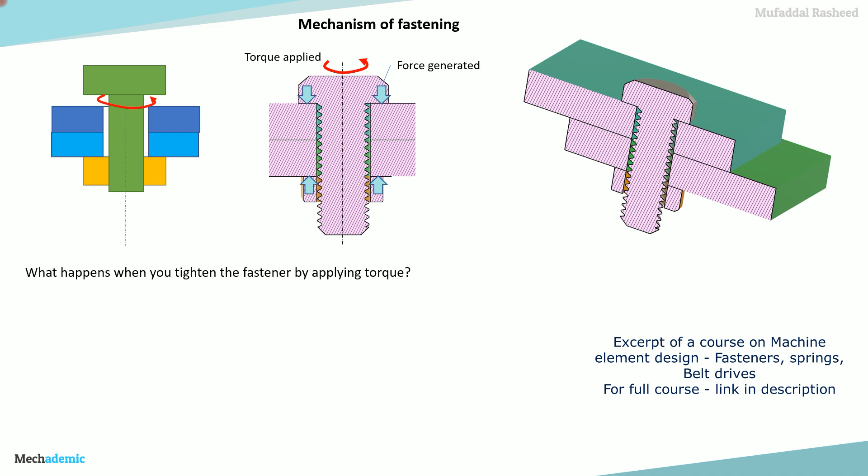So the key question to ask is, what happens when you tighten the fastener by applying the torque? What exactly happens internally inside the components? The first thing is that the bolt head and the nut will impinge the compressive force onto the respective plates, whereas the bolt internally will develop a tensile load. So internally the bolt will develop a tensile load which is tending to pull it apart as shown over here. So while the bolt and nut impinge the compressive force onto the plates, the bolt internally will have a tensile load acting inside it.

So this tensile load is induced due to the application of torque, and it is called the preload. This tensile load is very critical for the integrity of the joint. This load increases as more and more twisting moment or torque is applied, and it can reach as high as the elastic limit of the material. In many high strength applications, this preload or internal tensile load can reach levels of the elastic limit of the material for very high torque values, and it can also damage the bolt if the torque is applied excessively.

This internal tensile load acting inside the bolt will be equal to the compressive load which the bolt and nut impinge onto the plates respectively. If there is no external loosening happening outside the joint, the retention of this internal tensile load inside the bolt will make sure that the clamping is taking place and the function of the fasteners is satisfied. So irrespective of the external loading, the preload will always remain and maintain the integrity of the joint. If the preload or the internal tensile load is lost, the integrity of the joint will be lost.

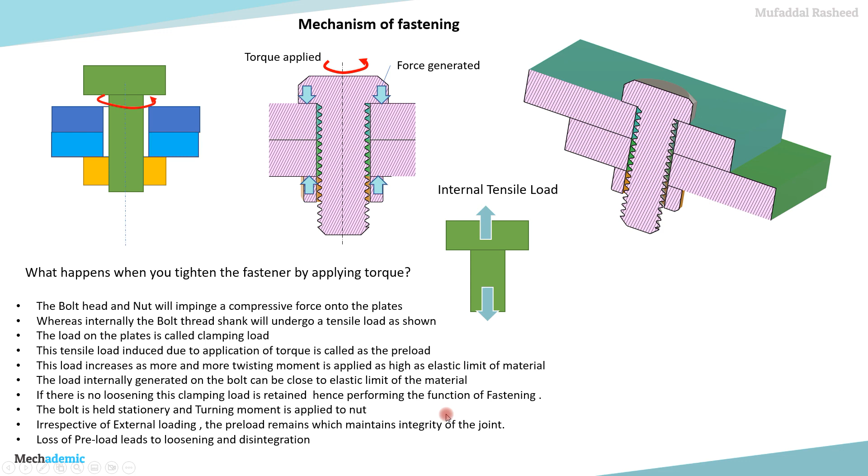So if we separate the plates and the bolt, we can understand the free body diagrams of each. So when the torque is applied, there will be compressive forces acting onto the plates as shown over here. If you consider the two plates as a spring, then the spring will compress. And if you consider the bolt as a spring, the internal tensile load will tend to expand the bolt. The analogy of the plate material and the bolt material with a spring is because the deformation is generally in the elastic range. So when the deformation is in the elastic range, the material acts like a spring with a stiffness K, which is a function of the geometry.

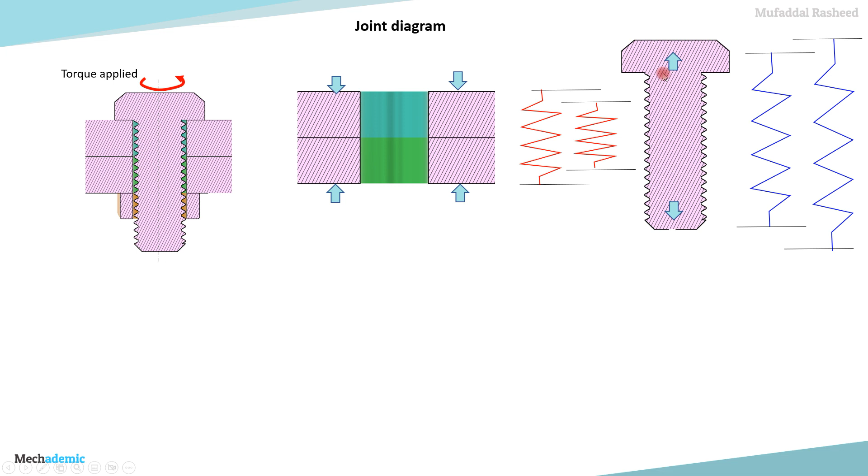So because of these loads, the compressive loads on the plates and the tensile loads on the bolt, there will be displacement. The displacement which the plates undergo will be in compression. The displacement which the bolt undergoes will be in tension. So if we plot the graph between load and displacement, load is on the y-axis and displacement is on the x-axis. If you plot the graph for the bolt from the point where the load is 0, the load gradually increases as we keep torquing the bolt, and it reaches a maximum point indicated over here. And for the plates, at zero load there will be zero displacement. As the load is increased, the displacement will also increase and reach a point over here.

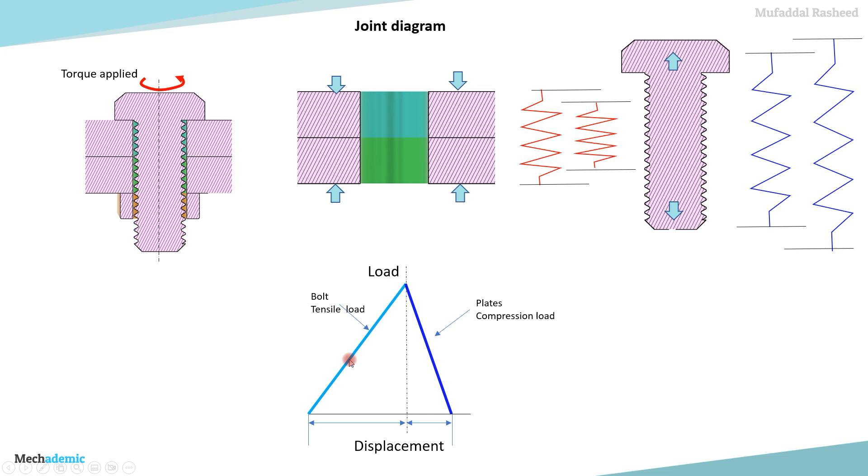So as you can see, the level of the load on the y-axis for both the plates and the bolt is the same, which means that eventually these two forces cancel each other out for static equilibrium. An important point to note here is that the two graphs will not have the same slope. They will not have the same stiffness because of the difference in the geometries of the plates and the bolt. To maintain the integrity of the fastener joint so that it does not separate, it is very important to understand the joint stiffness.

So the joint stiffness is basically the combination of the fastener stiffness and the stiffness of the two parts being clamped. So here is an assembly which shows two plates of variable thickness. One is the cyan color plate and one is the green color plate. Both are being clamped using a bolt, a nut and a washer. The washer is this one shown, which is used to expand the area of clamping. The washer has a thickness of T. The length of the members in the clamping zone, which undergo compression, is called the grip, which is shown over here by small l.

So this small l has the component 1, which is a cyan color, component 2, which is green color, and also the washer; these three are sandwiched in between the nut and the head of the bolt. The bolt has a non-threaded portion and a threaded portion. The non-threaded portion, which has a major diameter as shown, which is a shank diameter, is called the shank.

Length of the non-threaded portion is ld and length of the threaded portion is capital LT. Here, this is the length of the threaded portion, capital LT, and small ld is the length of the non-threaded portion. Small lt is the portion of large LT, the threaded portion of the bolt, which comes within the grip. The grip, as we have seen, is small l. From this point to this point, the sandwiched components are called the grip, and if the threaded portion comes in that length, then the threaded portion within the grip is small lt.

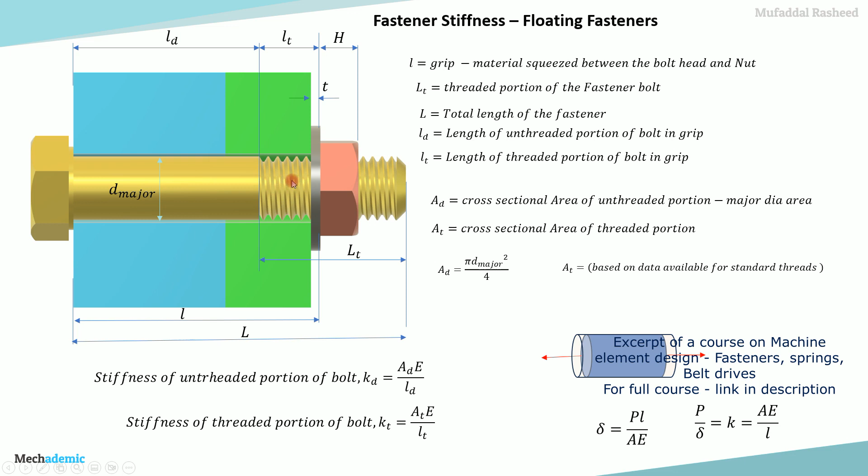So from this, we can find out the stiffness of the unthreaded portion of the bolt, denoted as Kd, and the stiffness of the threaded portion, denoted as Kt. So Kd is Ad E divided by ld and Kt is At E divided by lt. Here small lt is used instead of capital LT because we are only concerned about the length of the threaded portion within the grip, which is under compression or elongation because of the forces from the torque.

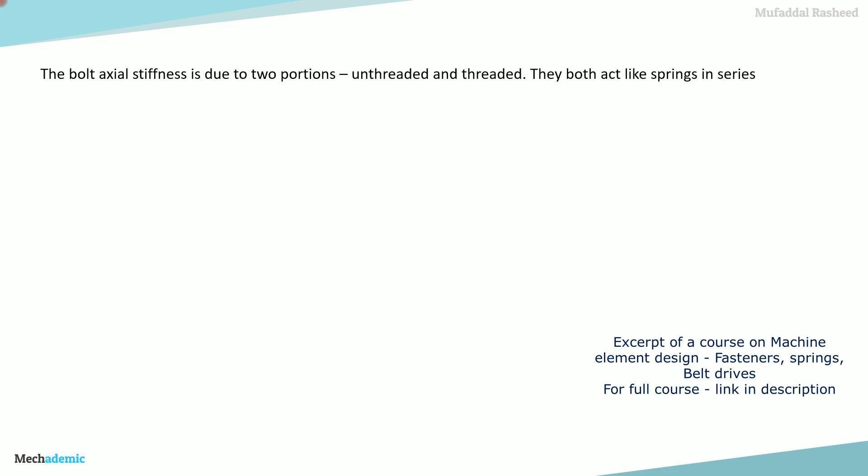The total bolt axial stiffness is due to two portions, the unthreaded portion and the threaded portion, which both act like springs connected in series. When we connect two springs in series, each with its own stiffness, the formula for the effective stiffness is 1 by K equals 1 by K1 plus 1 by K2, where K1 and K2 are the stiffnesses of springs 1 and 2. Here the springs are the unthreaded portion and the threaded portion.

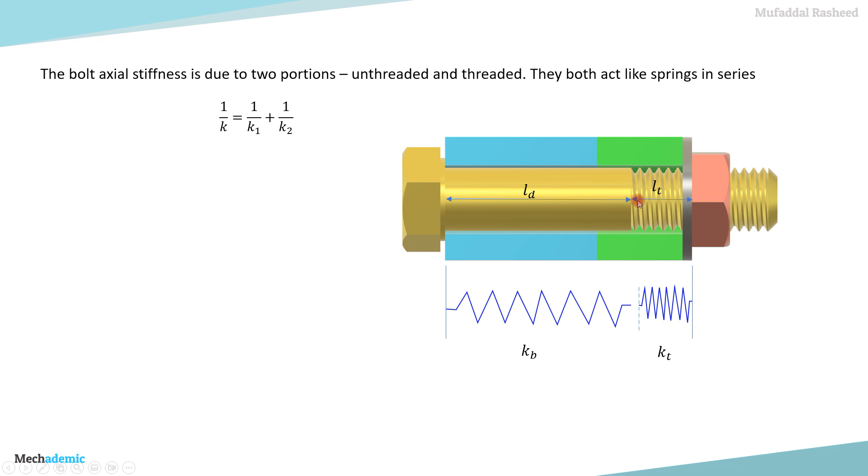Simplifying this equation, we get K equals K1 K2 divided by K1 plus K2. The effective stiffness of the bolt is Kb, and in place of K1 and K2 we substitute Kd and Kt for the non-threaded and threaded portions. So Kd Kt divided by Kd plus Kt is the effective bolt stiffness. Kd and Kt are already known: At E divided by lt is Kt, Ad E divided by ld is Kd.

Substituting these values and simplifying, we get Kb as a function of the cross-sectional areas of the threaded and non-threaded portions, the Young's modulus of the bolt material, and the lengths of the threaded and non-threaded portions. So Kb is the effective stiffness of the bolt in the clamped zone.